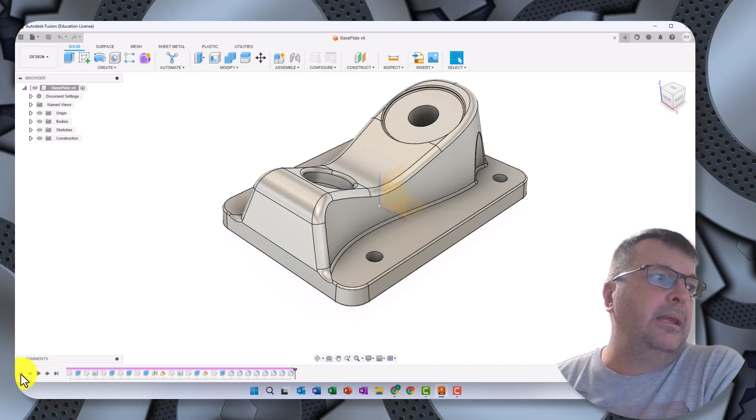We're going to basically go back to the beginning, and the first part that we're going to do is we're going to create a sketch. That sketch is going to be on our XY plane, which is our bottom plane that's there. So I'm just going to jump forward one step. And we've got our sketch, although you can't see it. So I'm going to double click on that. Just right click and edit sketch, just to bring that up so you can see that.

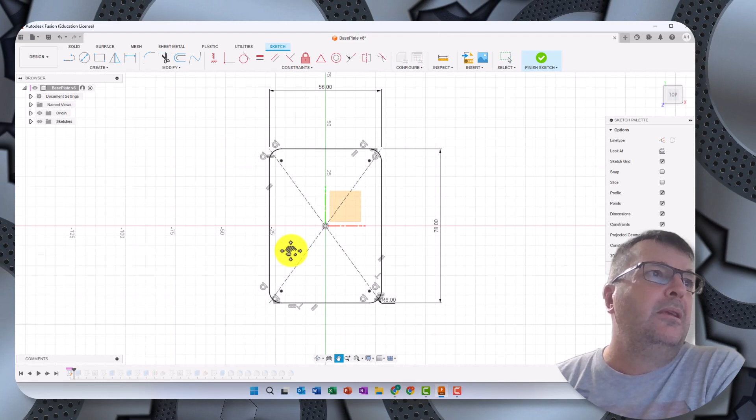So your first sketch that you're going to do is a centered rectangle. So if you go to the rectangle tool, you've got a center rectangle. And essentially what you do is you click in the middle and then you drag out from that. So I want you to click in the middle where the origin point is there, and then drag out diagonally. Once you've done that, then use the dimension tool, and you apply the dimensions of 56 at one end and 78 on the other.

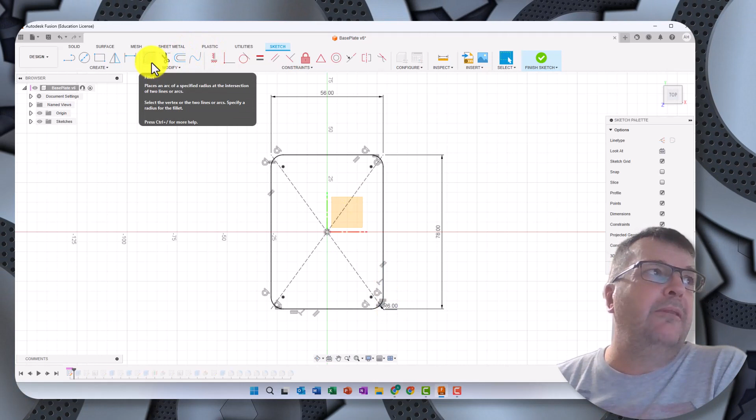And then you're going to use the fillet tool, which is this one here, and this is going to put a fillet on each of the corners. And the fillet is a radius of 6 millimeters. It's just down there. I'll make it a bit clearer. So that's your first step. Do that rectangle and make that the dimension 78 by 56 with radiuses of 6 on all the corners.

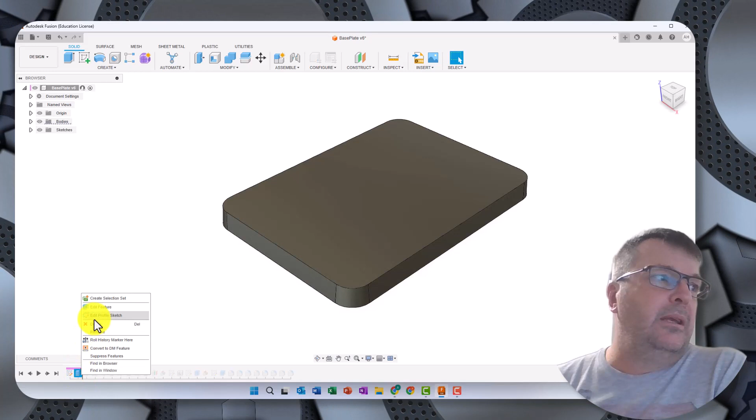Once you've done that, hit finish sketch, and then your next one is you're going to be doing an extrusion. Now the extrusion's not quite straightforward, but this is the extrude tool up here, or you can press E on the keyboard. So if I right click and go edit feature on the extrusion, you can see that we've extruded at 5.0 millimeters, but we've actually put a slight taper on that, and the taper is at 5 degrees.

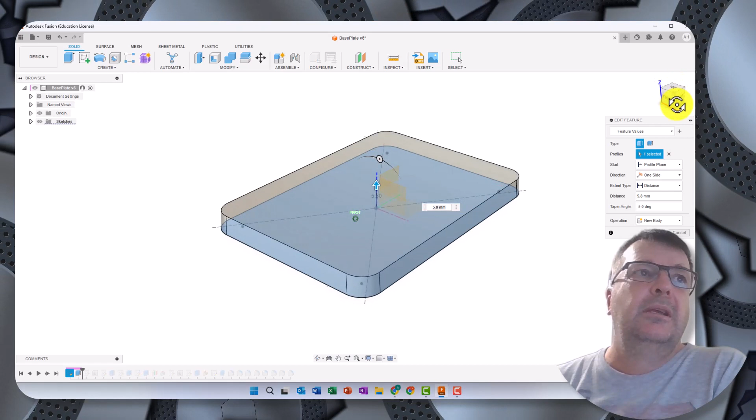Now if you look at it side on, you can just see that these are gently sloping inwards. So we've got a taper of -5 degrees on our extrusion, and that's the first step. So hit OK. I'm just going to cancel out of that. So there's our extrusion, our block. Next from there, we're going to jump forward a step. We've got another sketch coming on. Let's hit edit sketch and see what I've done here.

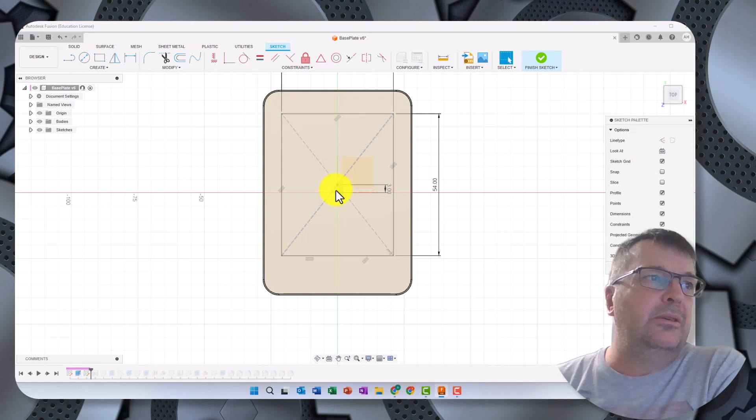So we've got a rectangle here. Again, using that center point rectangle. So there's the center point of the rectangle. We've drawn that just slightly off center, so don't draw it on there, otherwise it will snap to the origin. So draw your rectangle so it's just up and away from the middle, and then you're going to use the dimension tool to make it 54 millimeters by 42 millimeters, and apply a dimension between the center of the rectangle and the origin point, and distance that at 3 millimeters.

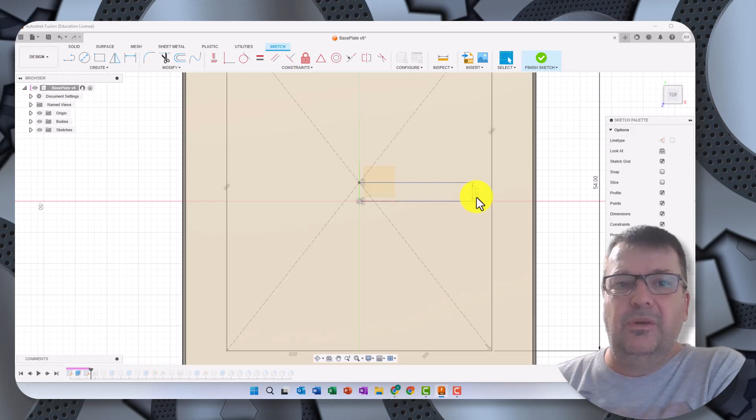So we're lifting up that square by 3 millimeters from the top, and then apply a vertical constraint. So we've got a constraint there, and we want to lock that in. So we're going to click on the vertical between that dot, and that's what those little symbols there mean. So we've got a vertical constraint on that.

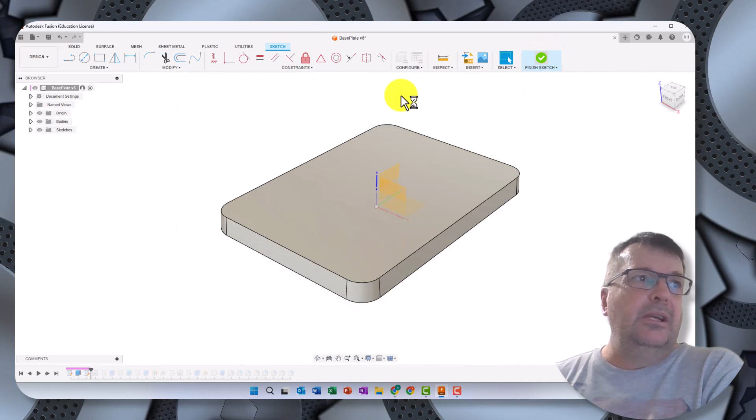Once we've done that, we're going to hit finish sketch, and then we're going to move forward another one. Now this time I've used the hole command, and I've put 4 holes in there.

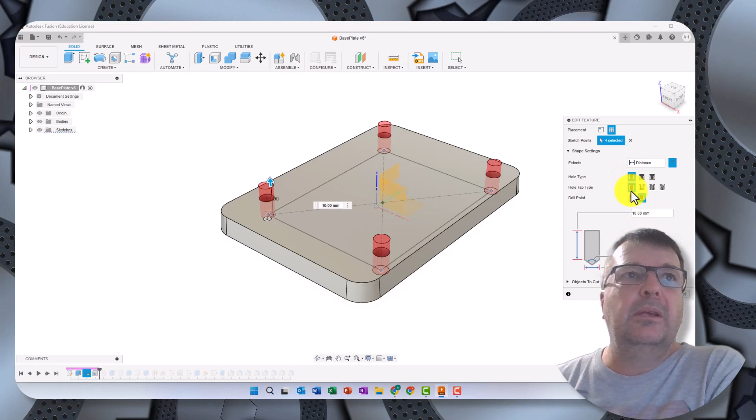So one of the things with the hole command, if I go edit feature, you can see that we've been able to pick up the corners of where our sketch was. Now our holes are just 10 millimeter holes, and they are going through all of it, so distance is through all.

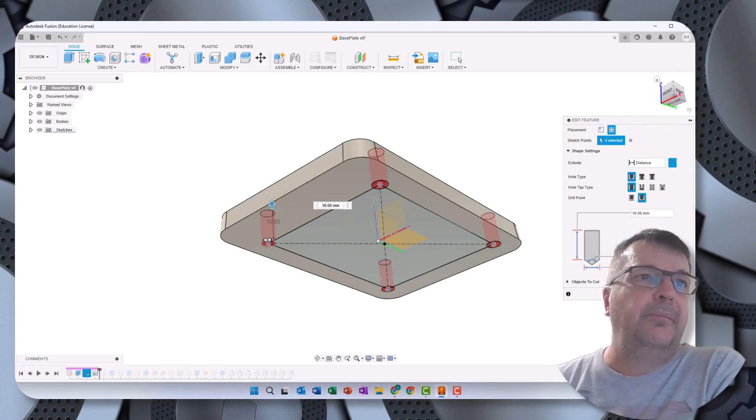You can see that I've actually done it from the bottom, so I've drawn that sketch on the bottom face, not the top face, and those holes are going all the way through the object to cut - you can see that's bottom because it's got bottom there. So go OK with that. Technically it won't really matter whether you're going from the top or from the bottom, but as long as your holes go all the way through, we should be good to go.

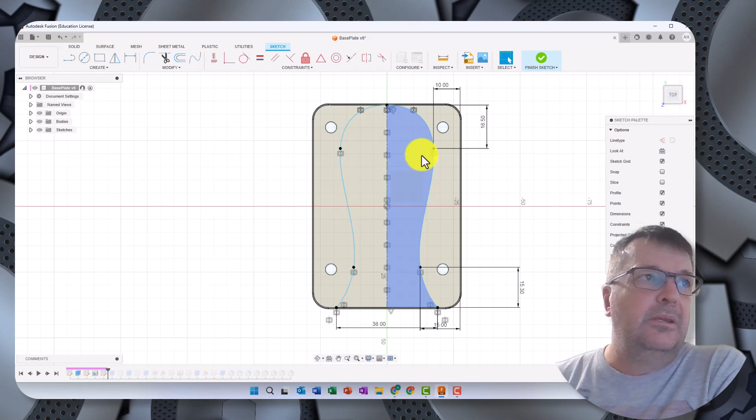Next step, we're going at another sketch going on here. Now this is a little bit tricky. What we've got going on is this funny sort of a shape, and it is mirrored, so this side is mirrored from this side. So you're basically going to draw this shape here, and then you're going to mirror that to the other side. And I think I've got that on the right one. Yes, I have. Okay, so what we've got is we've used a spline tool.

So if you go to the create and spline, and I did a fit point spline, and then start at the top here, work your way around. So it's going to be 1 click, 2 clicks, 3 clicks, 4.

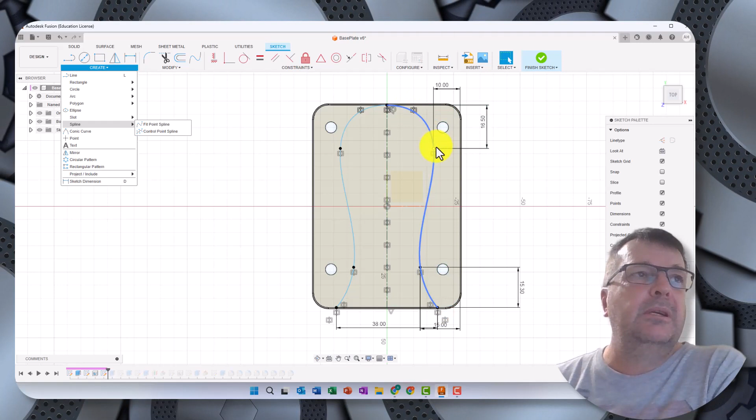And then you're going to put dimension the reference points there, 10 millimeters from that to the edge, 16.5 from the top to the bottom, 15.3 and 15 respectively. And the last one to make sure that these are 38 millimeters apart from the center.

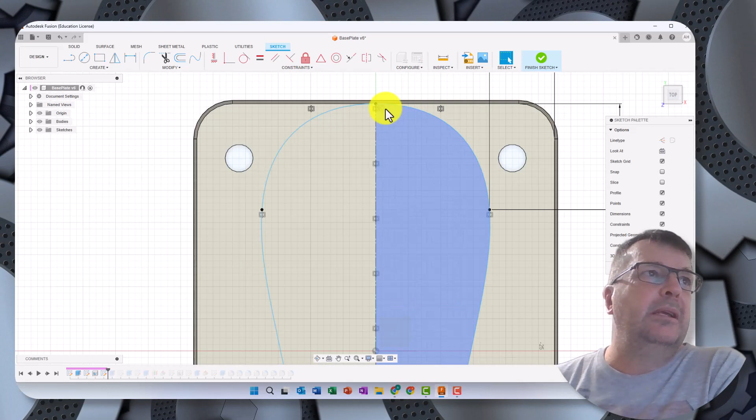And then you're going to do a tangent constraint, which is this constraint here, tangent, between the top of this arc and the edge that's there. Now there is 2 edges there, just keep that in mind - there's that one and that one. So I've picked the inside edges on all of mine. Okay, so we've got those.

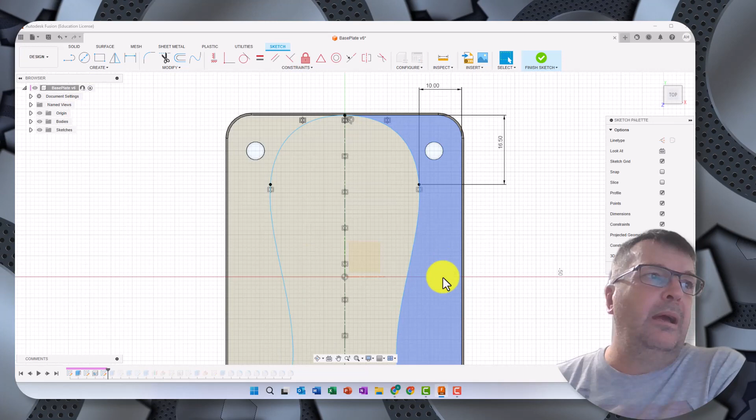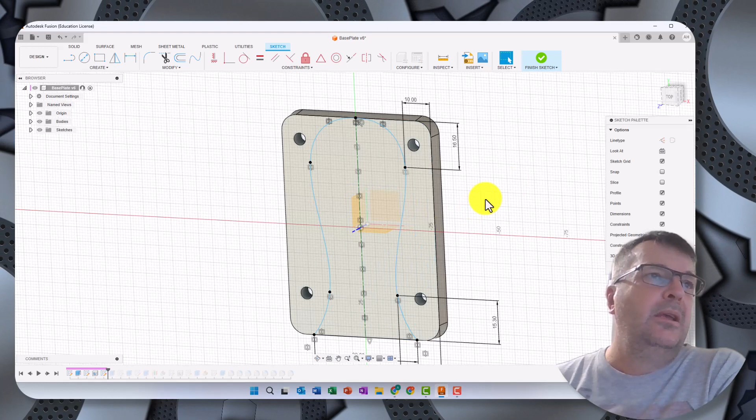Once you've done all that and we've got all your constraints locked in, then we can use the create, we can mirror, and you can select that line and mirror that around the origin. If I push this sideways a bit, you will see it - there's the origin plane there, the y-axis, and you can mirror around that so you can get that to the other side. So that's what we're wanting to do.

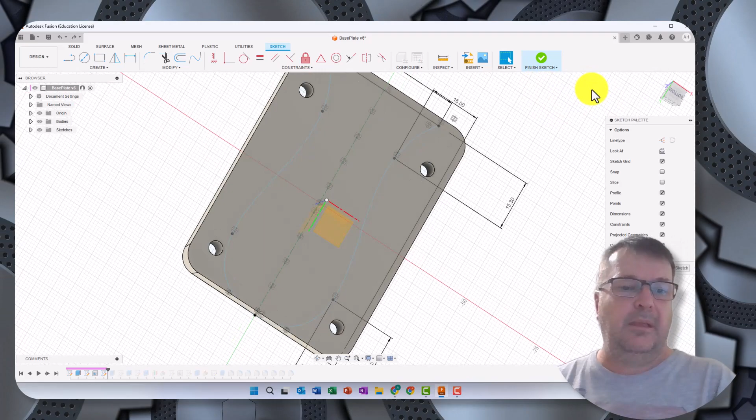So we haven't got any, what's going on with my mouse? It's having a bit of a hissy fit, is it? Let's see if we can get this going again. It's stuck in limbo. So we haven't got any angles or degrees on any of those arcs - they are what they are. Let's see if I can get out of this. It's still attached to that. I wonder how that's done that. That's interesting.

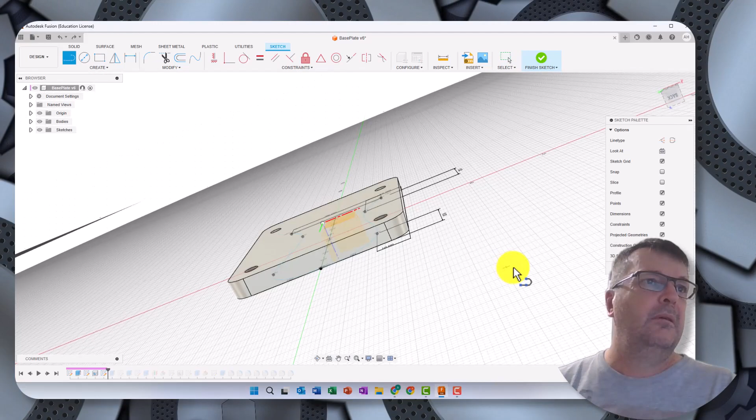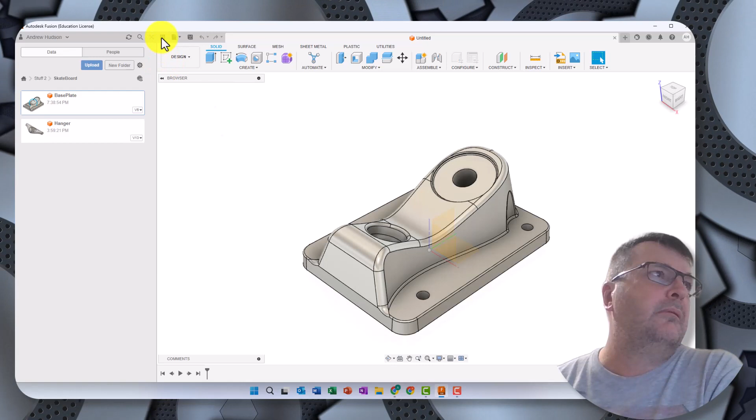Alright, let's try this, see if we can get that right. Might have to open and close it again. So once you've done that, go finish sketch. And I'm just going to close this, and I'm not going to save it. I'll try opening that again and see if my mouse is still stuck to it. No, it's not, I don't know what was going on there. Where do we get to? Let's bring it back.

Once we've done that with the sketch, make sure you go all the way around so it's a closed sketch. Once you've done the outline, draw a single line going across the bottom between these two dots here.

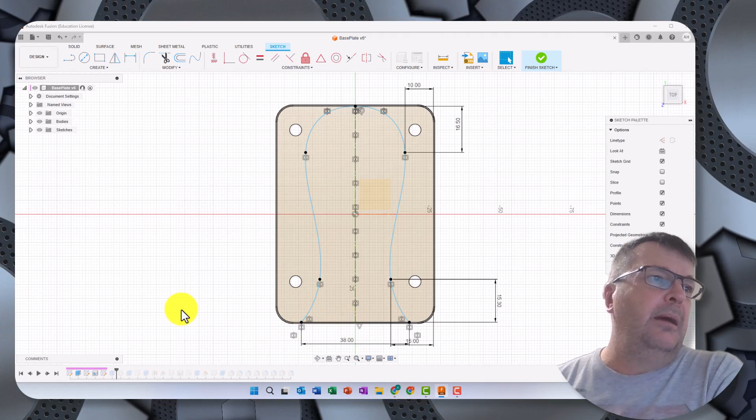Once we've done all that, we're going to go finish sketch. You're then going to extrude that, and the extrusion again has got a taper on it. If we bring that up, you can see we've extruded at 25 millimeters with a taper angle of -12. Then you go OK, and that'll give you that shape there.

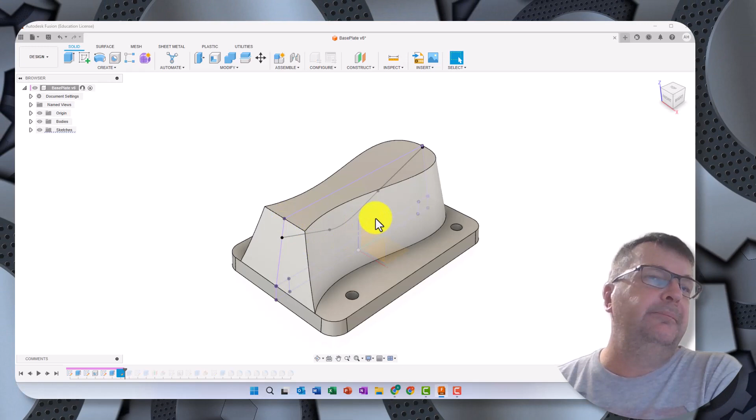We'll do a couple more steps here and then do a second video. Now we're going to draw a sketch on the center plane. You can see there's a sketch going through there, and we've drawn that on the YZ plane. If I right click on that and go edit sketch, we can see what we've got - that's your sketch there.

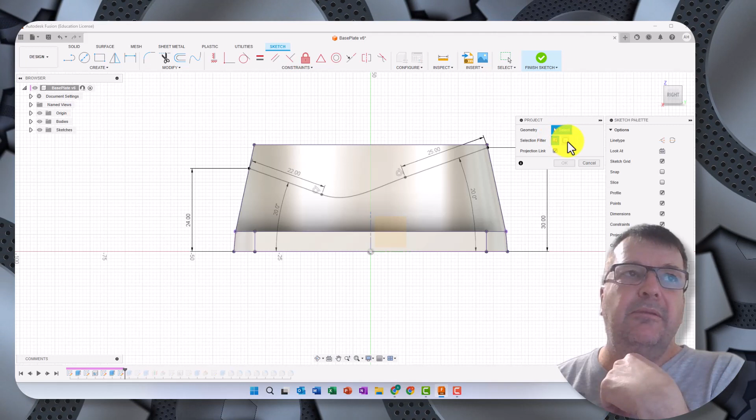You can use the project geometry to project the body that you've got. If you go up to create and go project, you'll get this window, and you can either specify entities or specify the whole body. You can mouse over it and pick up the edges - I don't know if you can see it in the video, but it goes red. So you can use the edges there.

Once you've projected those edges, when you try to draw on them, your dots will snap to those - the endpoints will snap to those lines. If they don't, you can use the coincident constraint to constrain those to that.

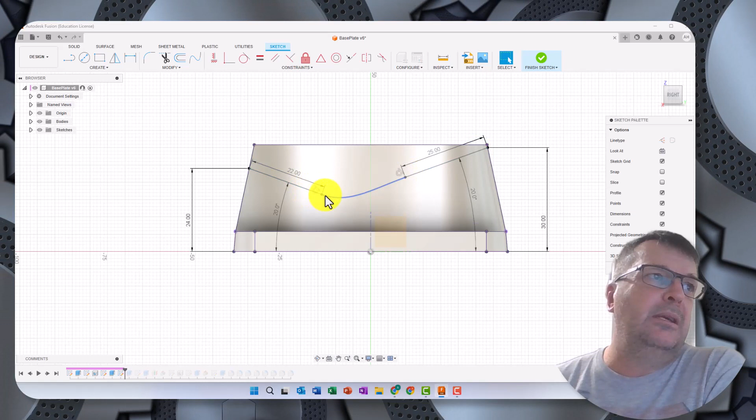So we've got another spline going on here. We've got a straight line, 22, a curve going up, then 25. We've got a tangent between these two here and a tangent between these two here. And then we've got angles going on - 20 degrees between this line and the base, and 30 degrees between that line and the base. This dot is 24 up, and this one here is 30 up.

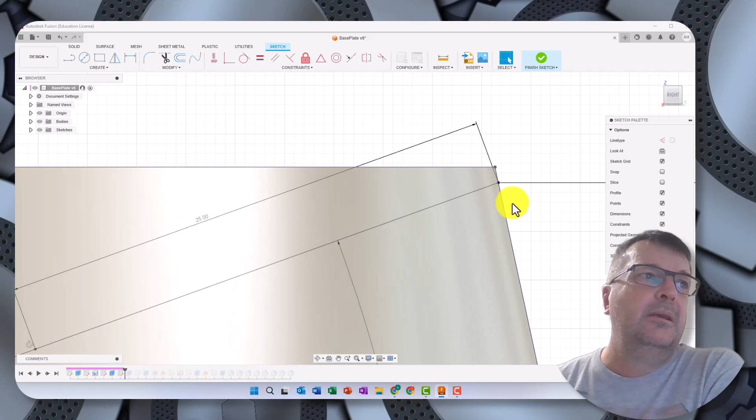So it's not quite at the top, you should have a little gap there - you see there's a gap. Okay, so it should be that. That's your sketch, there you go, finish sketch. And so that sketch is hiding on that plane that's in there.

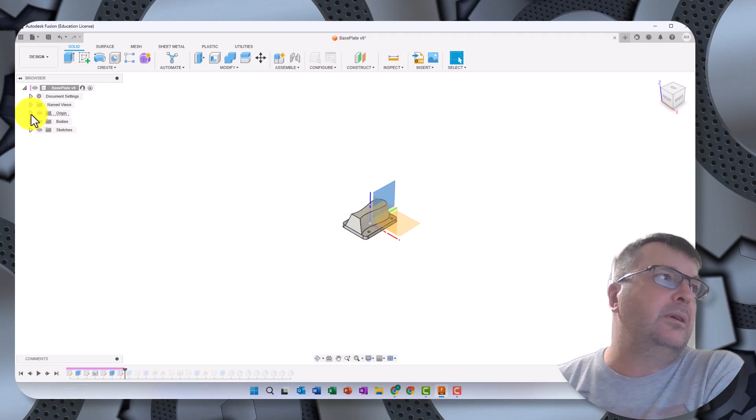Now if you have problems with that, you can zoom out so you can see the plane. Click on that, right click on that, and go to create sketch, and that'll get you there. Or alternatively, you can go to your origin, go to the YZ, and right click on that and go create sketch that way too. Either way works.

Once we've done that, we're going to extrude this, and we'll do this as the last little step, then I'll make my next video.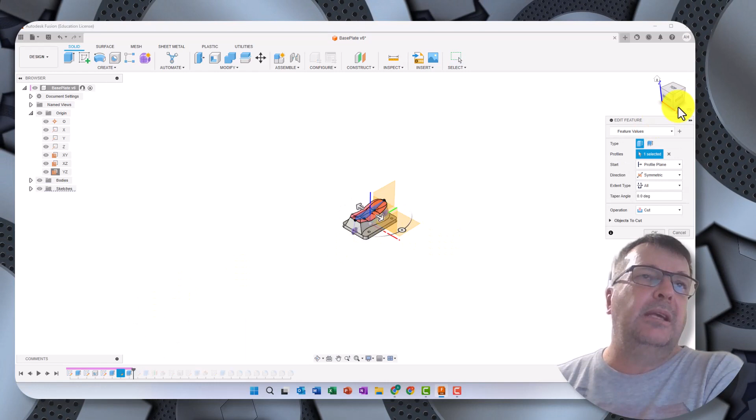Edit feature, so you can see that we've done this as a cut. It's a cut going all the way through, and it's symmetric, meaning it's going both ways from that plane. So if I do this, you can see there's the center plane, and it's going equally this distance and that distance from that plane. That's your symmetrical cut, which will leave you this shape here.

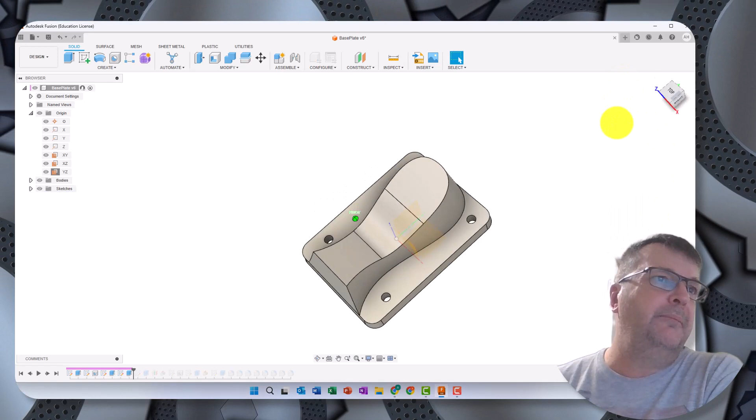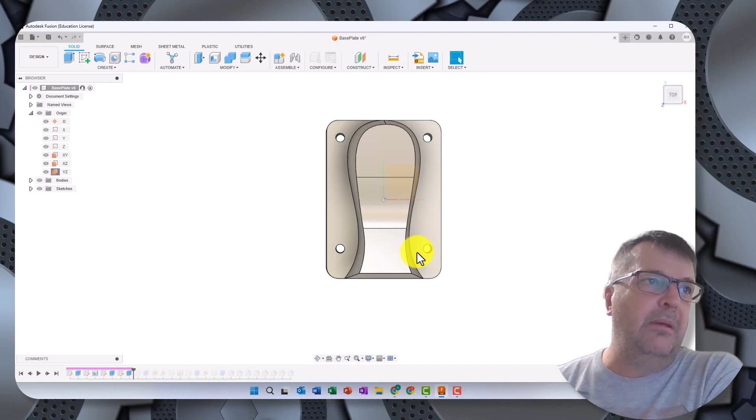Now, this is a trick I almost got caught out on. The holes closer to the edge - these holes are closer to this edge than these holes are to that edge. Make sure the rounded end of the shape is at the same end as the holes that are closer to the edge, and the ones further away should marry up where these groove indent parts are on the side. So that's the orientation you want - make sure those holes match up to the shape that you've got.

We'll leave that here for that first video. Hopefully you can follow that along. Part 2 of the base plate will be coming up shortly, and we'll whiz through that.